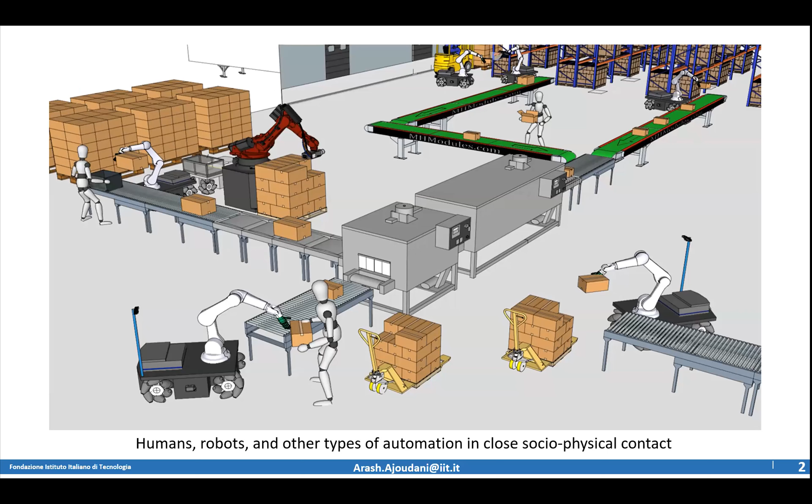The title of my presentation, as you can see, is the Anticipatory Control of Human-Robot Interaction. What I will be talking about is how we are building, with my guys in the lab, the elements that push us and motivate us toward building interaction autonomy for robots that are supposed to interact with the environment and the humans.

This is an image we've created over the past years before we arrive at full autonomy for our robotic and automation systems, where most of these human-robot interactions can also be automated. I think for the next tens of years, we will have this scenario, and we are pushing towards creating hybrid systems. Robotic systems, flexible robotic systems, and traditional automation come in contact with humans, and robots and the environment are actually in close physical and social interaction.

What's really important, one of the most key features you can see, is of course the interaction happening between robots, as I was mentioning, traditional automation and robots. So the talk here is focusing on how we can actually boost this interaction autonomy on our robots.

If you look at this problem from a macro perspective, it's a naive presentation, of course. We have the corpus, which is the robot, interfaces, learning, control, everything that collects the way that corpus interacts with the environment and the human factors.

Starting from the first, let's say, closing the loop, the easiest way to perform and create an interaction autonomy towards the environment is to close the loop through visual perception, right?

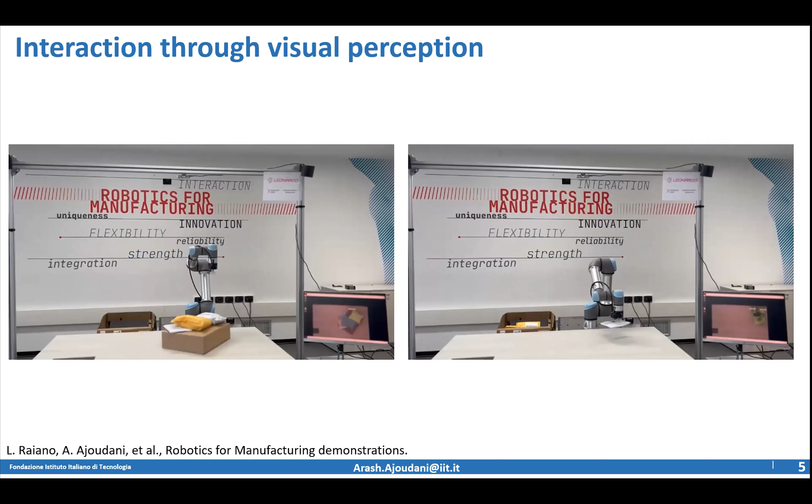So what do we do usually? We have really nice, reliable perception systems that we are also developing in the lab, that detect environmental variations and we plan accordingly for grasping randomly thrown objects or objects that are put one on top of each other. This has been really nice, and most of the approaches are like this: one-shot perception, planning, and manipulation.

Perception is one way, visual perception, but of course it's not enough. Most of the cases, we are also interacting through touch. For instance, for a blindfolded robot, we want to increase its interaction autonomy only through touch. Believe it or not, planning impedance and planning interaction is really, really important to make your robot plan autonomously.

Let me give you an example. If someone wants to pass a wire from a hole there to a hole coming up from there, you don't really know what's the path, and you don't have to plan for the trajectory. You just push the fishing wire with the wire attached to it, and it finds its way out. And how it works, it's actually some sort of impedance planning embedded to it.

For those familiar with the concept of impedance control, especially when we represent the impedance stiffness and damping at the Cartesian level, both for translational and rotational, with the stiffness ellipsoid - through singular value decomposition you can know in which direction, what type of stiffness and damping you're applying. You can actually plan for this in advance and have some principles that help you towards better interaction autonomy.

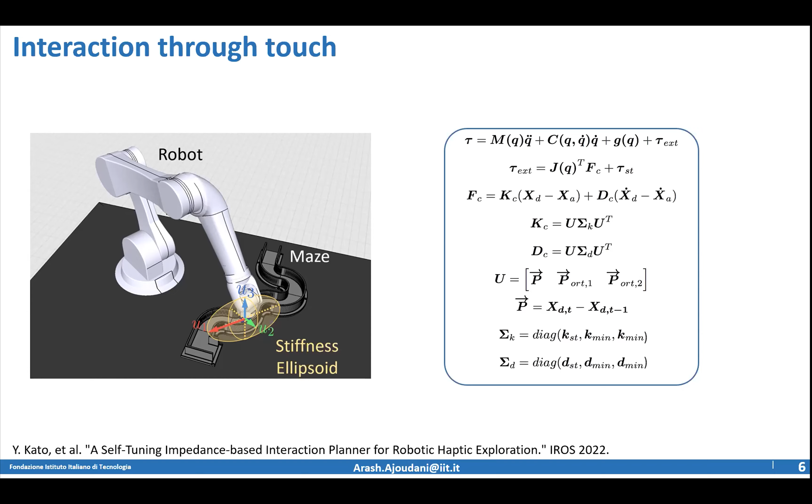It's really nice that we only need 2 points while the robot is moving around the environment to be able to replan. The main rule is to be stiff in the direction of the movement, stiff enough, and compliant in the rest of the directions, so the constraints coming from the environment can help you navigate without seeing it. If you have the first contact, since you're stiff here, the rest of the compliance will let you comply with the environment and move along.

You will arrive here. Through these 2 points, you can actually update your stiffness ellipsoid and damping ellipsoid if you want to do inertia shaping, the whole impedance parameters, and you can move and finalize the path. We need to actually plan for some unexpected, really rigid constraints, and we have implemented some bouncing strategies to perform this task.

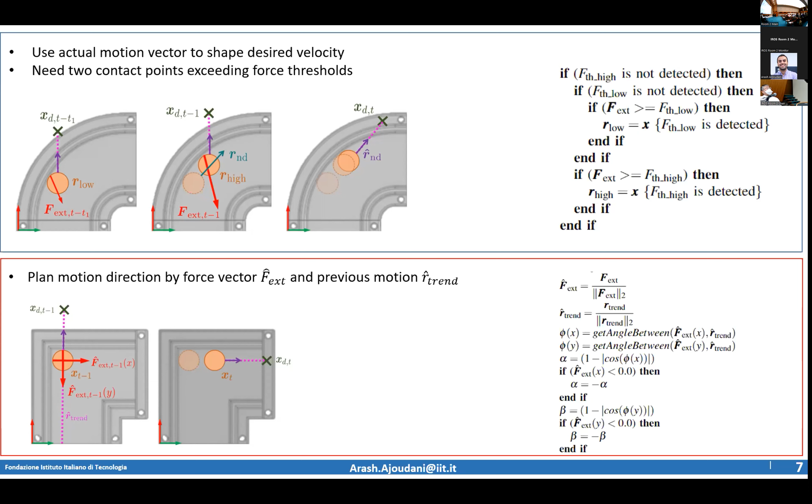This is one example that we did with Yasu and Toshi and my guys in the lab. What happens here is that, only through interaction, the robot finds its own way. On these 2 columns, we have the same planner, but with low and high constant impedance values. Even though it tries to find its way out, impedance planning seems to be really important.

You can see the ellipsoid is changing according to the contact forces that it's perceiving and going through the path. Also, when it comes to external disturbances, it seems to be very effective.

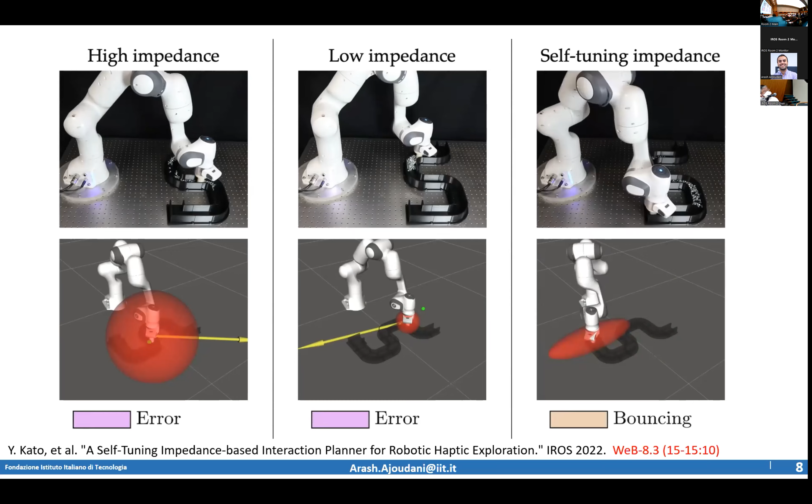Someone might say, okay, in terms of interaction with people, robots, this is really a good communication channel to boost robot autonomy.

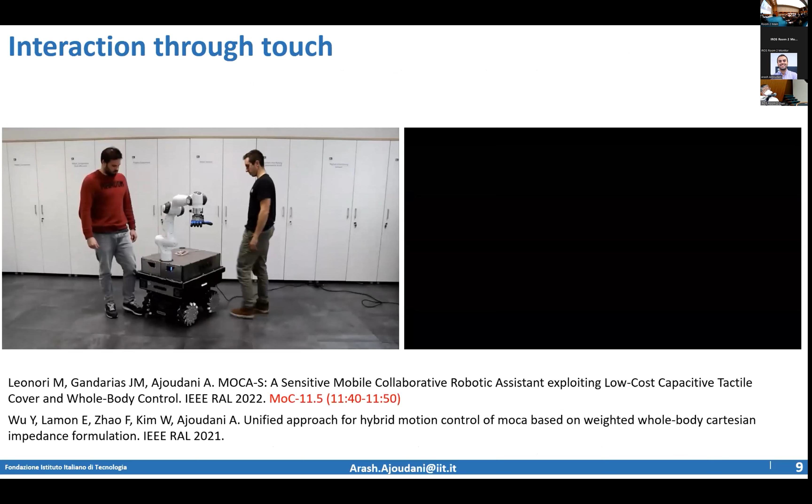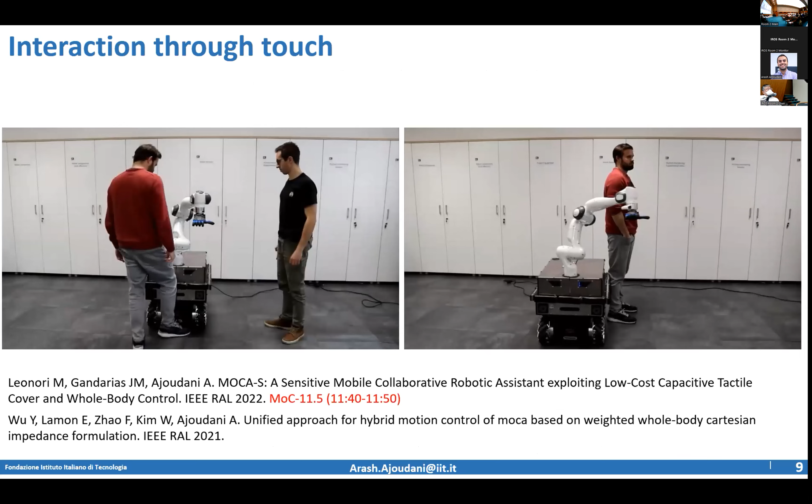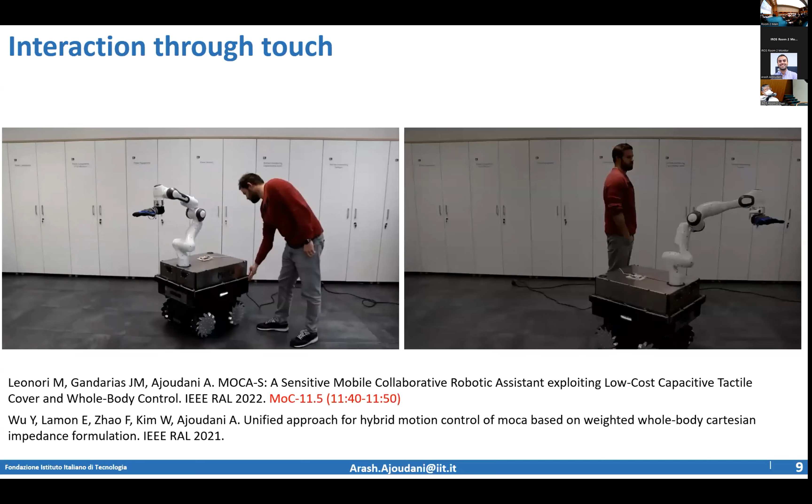Today's robots are torque controlled. Even if you have velocity controlled robots, you can put skins that we developed around our MOCA robot. You can see Juanma and Mattia here touching the robot from any point, and the robot is complying with that. Since touch is the lowest important layer for interaction and ensuring safety, we have also embedded this in our planners.

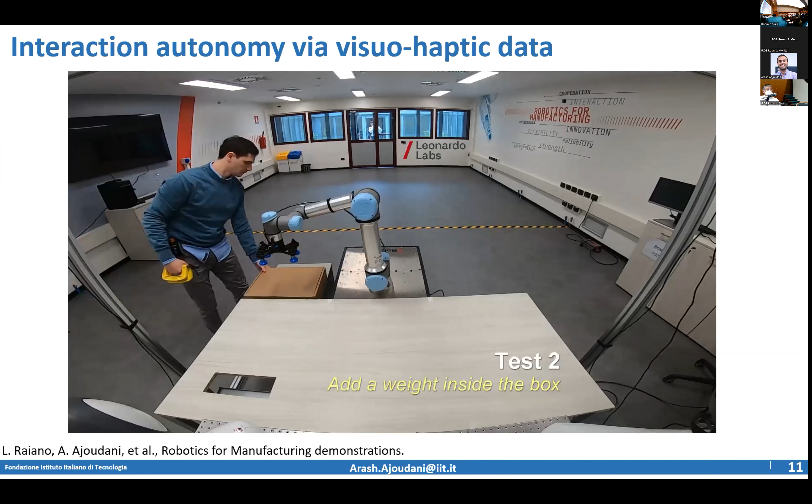It turns out, of course, it's a great idea. We have been working on this, everybody has been working on this for a long time. For instance, through vision, you can detect a box and grasp it from its geometric center. But what happens when the center of mass of the box is changing? You can actually measure this through your torque sensor, replan, and improve the reliability of your interaction planner and your interaction with the external environment.

The robot has no idea what's happening. It grasps, detects the changes of the center of mass of the box on the fly, and grasps it from where the center of mass of the object is, not the geometrical center. So it actually improves the robustness of your interaction autonomy.

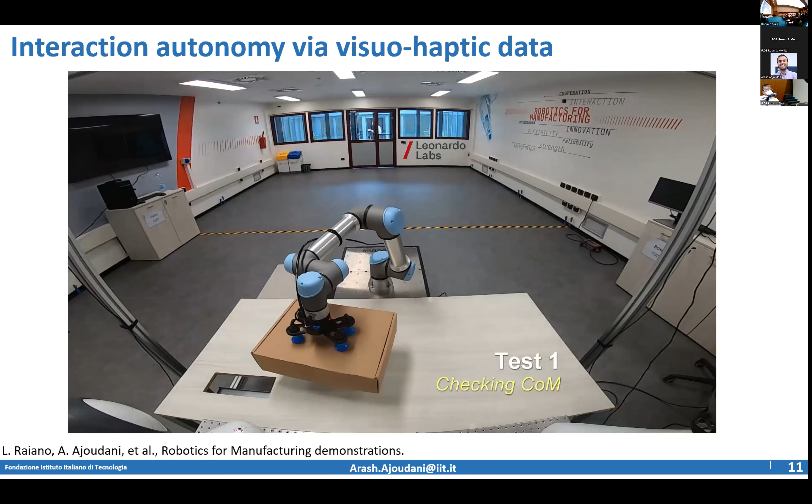But quite frankly, it's way beyond just combining visual perception and touch. It's not a plus, it's more of a regulator, and it depends on how much confidence you have on the sources of information from vision, force torque sensor, or haptic data. There are many sources of uncertainty that tell you which source is more reliable. You can have uncertainty in visual perception, calibration, modeling error, latency, control errors, and disturbances.

Just to give you one quick example: imagine you have a robot that does single shot planning based on visual perception. The robot goes and picks an object with algorithm 1, and it goes towards the second object with algorithm 2. You might ask, which algorithm performs better? Everybody will say algorithm 1.

Most probably yes, but probably also not, because maybe all the uncertainties of the system are in favor of algorithm 1, which is actually working worse than algorithm 2. So maybe algorithm 2 is more globally valid, and you were just lucky that uncertainties of the system, simply an uncalibrated robot, helped you arrive at point 1.

So we get into this more in detail. For instance, in a really complicated box item sorting task, which is one of the use cases in the Sophia project that I'm coordinating, this is really complicated because there's a lot of uncertainty in the placement of the box and the way the objects are placed there.

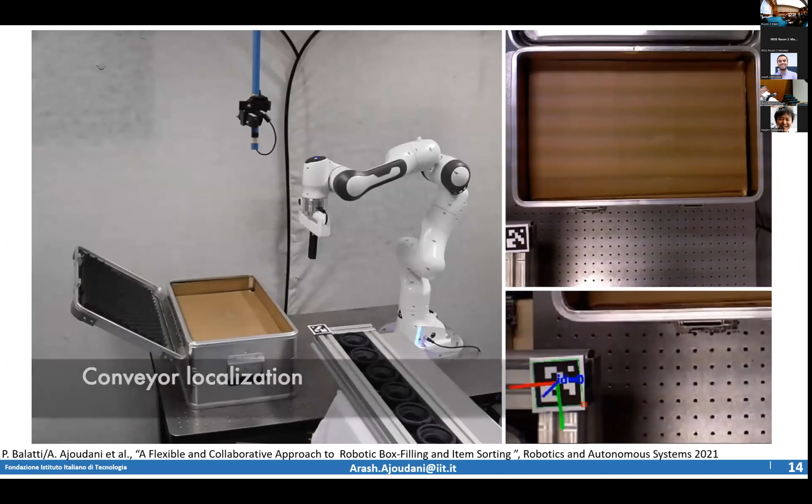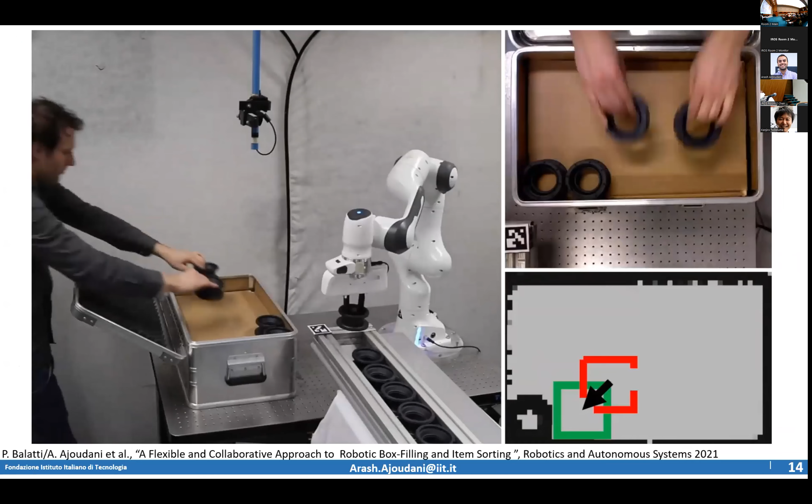Bringing this into robotic application, as you can see here, the robot intentionally adds some noise to our visual perception. You can see the robot taking this through the occupancy grid map. It plans where it should start, slides through impedance planning as I mentioned, exploiting environmental constraints to perform this planning and complex, interactive, contact-rich task without a super fancy position or trajectory planning involved.

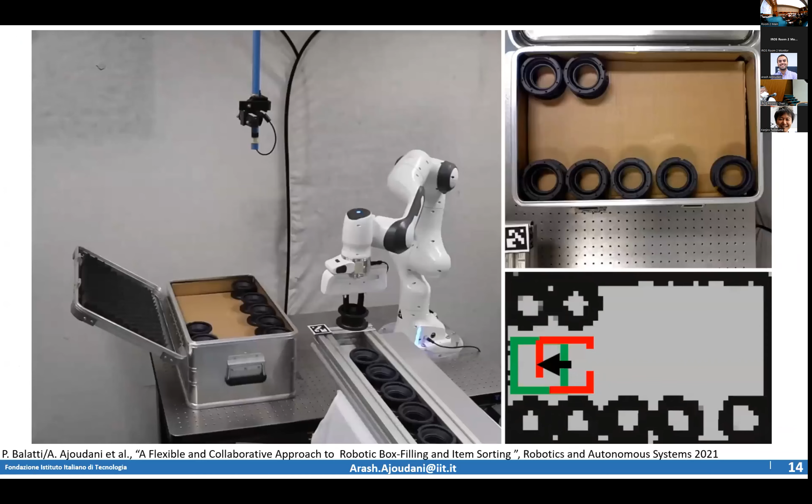So this algorithm is not designed to be collaborative, but at its core, since you're complying and responding to external disturbances coming from the environment, you saw Pietro change the position of the box. Visual perception captured it, but there's some level of uncertainty to it.

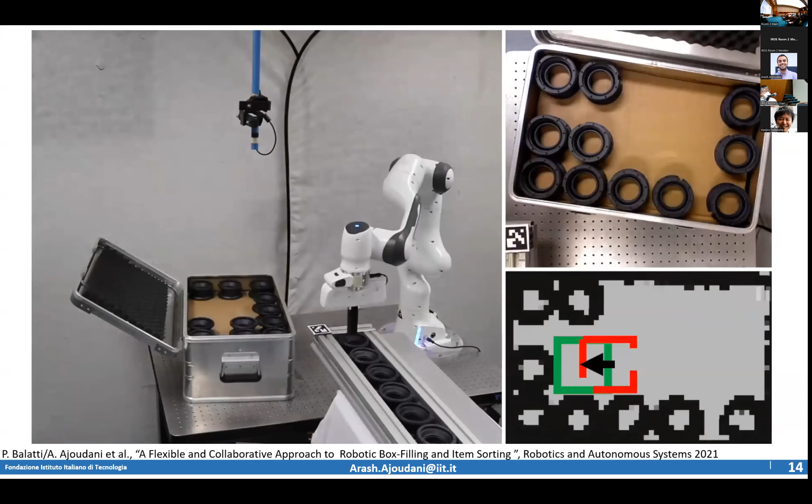You can also capture if objects are being added or not, so the robot is actually adding and responding to that on the fly. There's no need to reprogram everything, because you can just tune your confidence towards different perception sources that you have. Even if you have different objects inside the box and ask it to resort them, you can see this nicely through visual perception plus planning through touch.

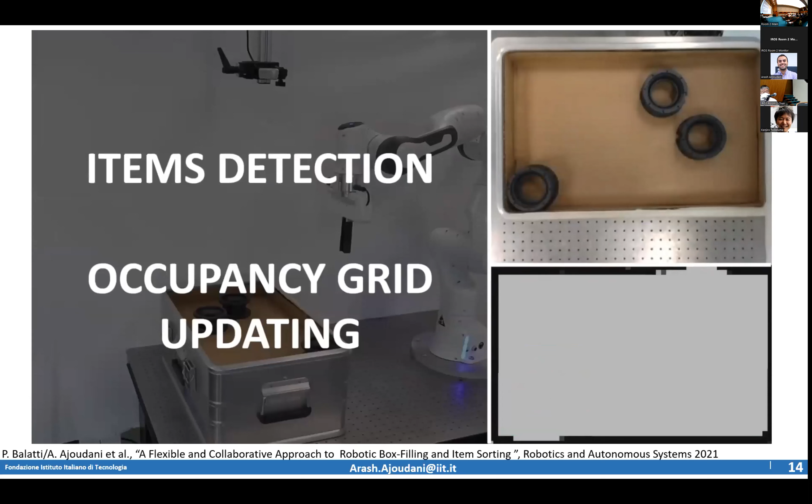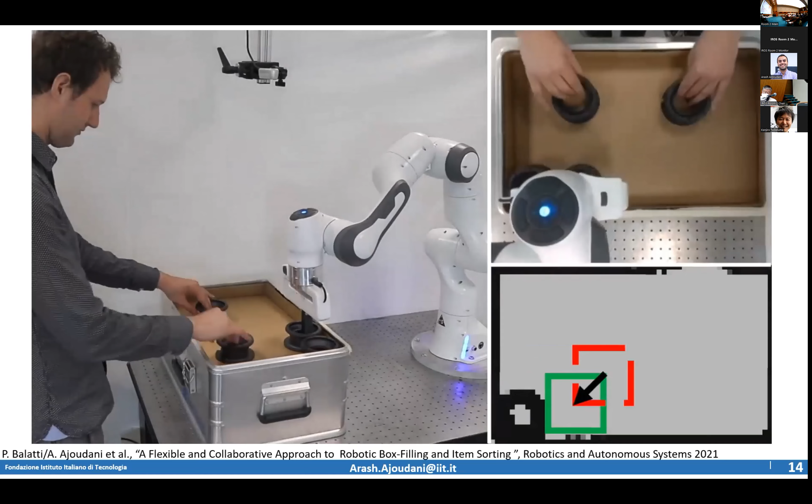You can simply replan them, even if you can create collaborative systems without even knowing that you're creating collaborative systems. Pietro feels like contributing, and he puts some more objects, and the robot replans and makes actually the thing faster.

So just to give you an example, if you don't do impedance tuning with everything else included, in a certain phase you're sliding towards putting this object here, when the contact happens you have a rigid constraint. And if you're rigid in all directions, you will have high interaction forces, which happens without self-tuning, and the robot triggers the fault.

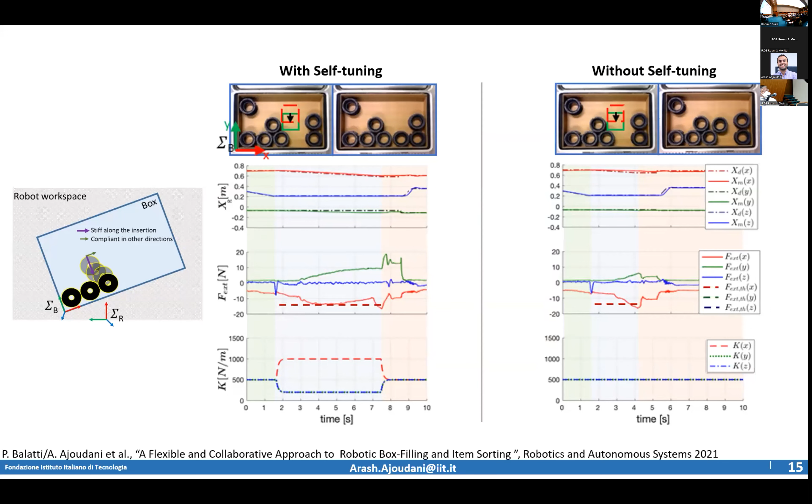You might even damage the environment. But on the other hand, if you're compliant, as I was mentioning, you can perform and respond to the uncertainties that come from the planning task or the environment. The balancing of visual feedback, visual information, and touch is also really important to go beyond what I was mentioning.

For instance, in collaborative co-carrying, what we usually do is build our admittance controller based on what the human is applying. Doganay is applying some forces here. The robot responds through a whole body admittance controller, plans torques and virtual torques for the environment. But what happens if you have a rope? It's flexible, right? So you cannot really get information in these directions.

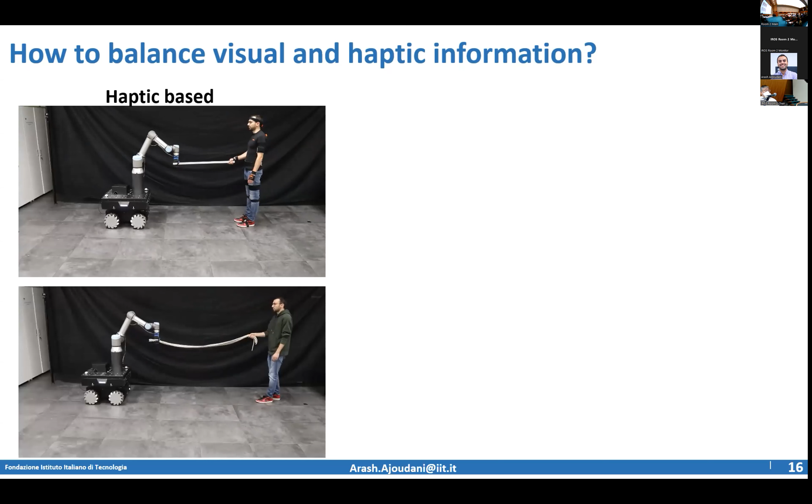And the force information you get in some directions is imperfect. You need to push so that you can feel some forces that you can move it along. You might say, okay, let's just do some sort of teleoperation locally, you just watch the person move. It works, of course, for the robot, but it's not going to work for this because you have to create some movement before you are able to go.

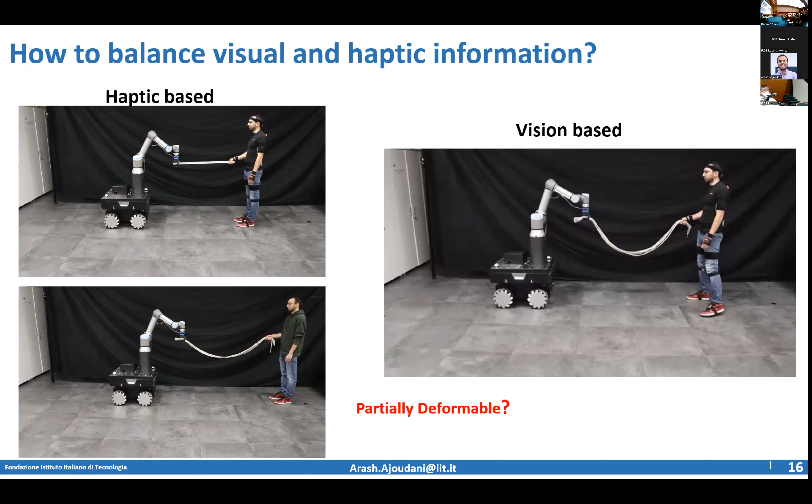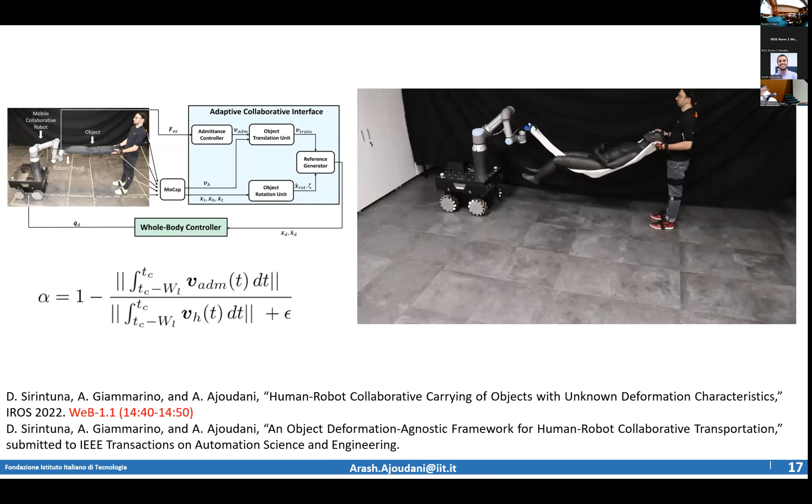Especially when you have partially deformable objects that you don't want to model because it's useless, you can actually respond to that. So we started to look into this. It's more elaborate than that, please do have a look at the papers, we have one presentation in this direction as well. What we do is on the fly, in real time, look at how much information we are getting from vision and force, and adaptively configure our controller based on that.

So one of the PhD students passed away. No, I'm kidding, of course.

So this is just a mannequin, and as you can see, Doganay is moving the robot. It's a very flexible, let's say, material. And you can see through intention, through posture, you can do not only translation but also rotation. It's quite nice. The controller has no clue what you're carrying. It can be rigid, flexible, semi-rigid, semi-flexible, also directionally different, and you can actually perform these tasks.

So we also, as I mentioned, did some testing on semi-flexible objects, and it turns out that you're actually applying less force even on rigid, and in semi-rigid cases, it's easier and more reliable in terms of effort to carry objects from one point to another.

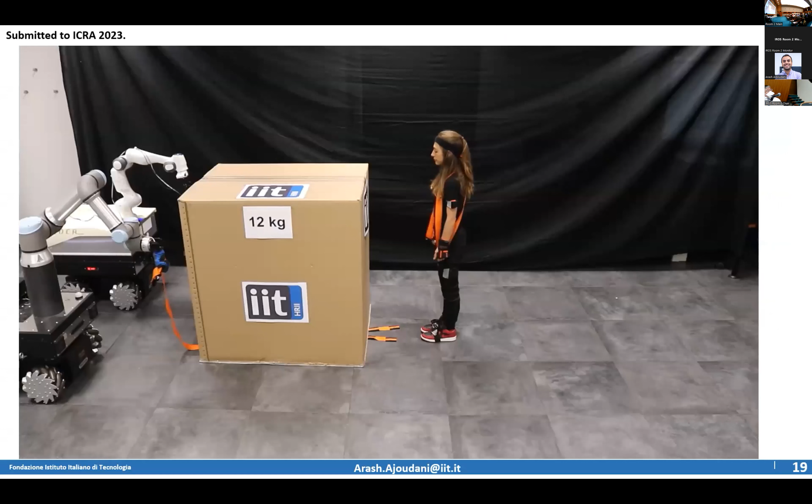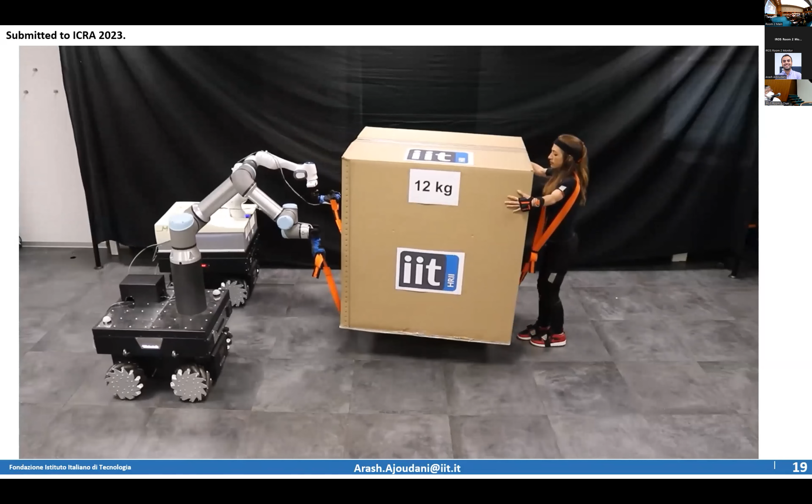So we didn't stop there. To carry non-graspable, really bulky and rigid, heavy objects, you can actually use these straps. The same technique works for multi-robot control, and through this, Idil is actually co-carrying this large box, and the robot is only reflecting all the twist and wrench basically at its end effector, and according to our planner is moving and helping Idil go up and down, left and right, rotate, and all that. The robot has no clue about what you're carrying, just like before, and has no clue about what the other robot is doing except just avoiding the collision.

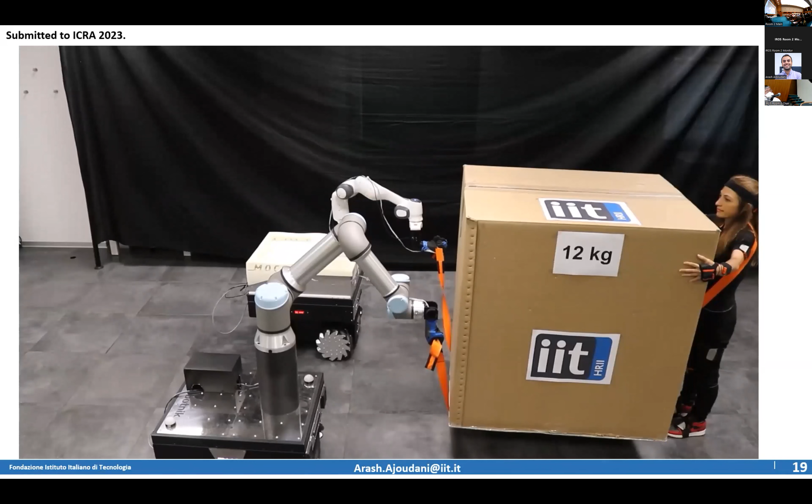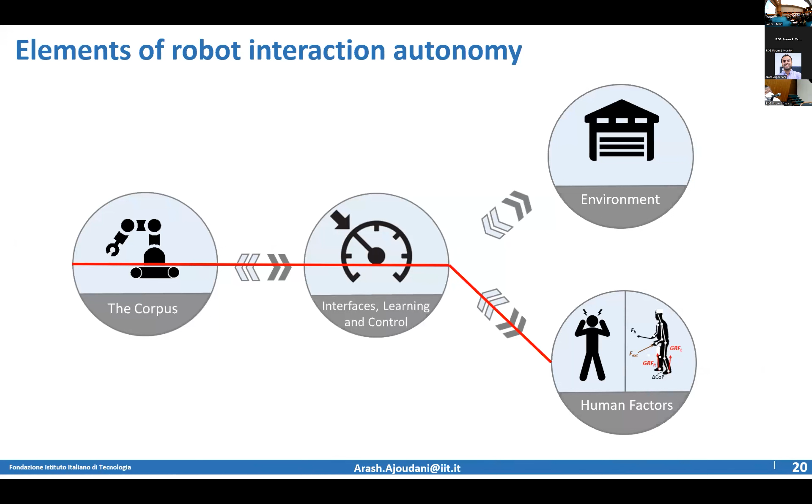So this is a little bit of course, we are working more on that, but just to tell you a little bit of some stories about how we can make sure the interaction between robots and the environment is also effective. So we've been doing some research over 5-6 years on this, but I'm going to walk you through a little bit of what we have been doing in physical and cognitive modeling of human intention.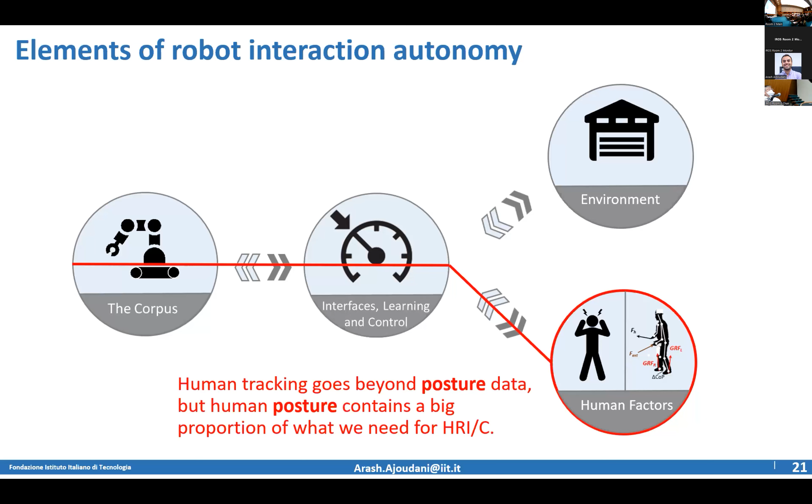And our approach is to look at the posture. Posture data is way beyond just movements of the people, and I will tell you how we are looking into this. So from the physical perspective, our approach of modeling humans is humanoid based.

So we started from a whole body control point of view, saying that, okay, you're in equilibrium condition, center of pressure is here, ground reaction forces. When you have an external force applied, center of pressure displaces, ground reaction forces change, set up your whole body controller. We have some tricks there, 5 papers, please have a look at them, actually 4.

And then you find out what the effect of external force is on your joints—it's called overloading joint torque. Obviously, we wanted to calibrate and personalize this model through online models. This black shadow shows the minimum required information for you to build this model, whatever you need, once in a lifetime, unless you eat a lot and your center of mass varies.

After identification, which takes a minute or so, the model is built. So in real time, as the person moves, we set some risk levels. When Luca is going to pick this object, the overloading joint torques are shown. In real time we can track them—you can see the shoulder becomes red and stuff like that. It tells you how much loading you're applying to the person.

We had an assumption that the person is interacting with the hands. It's a valid assumption, but not always the case—sometimes you're interacting with the external world through the elbow. These are also really nice tools in robotics and humanoid theory: through torque equilibrium, you can understand where the point of interaction is by setting up the torque equilibrium condition at the joints. But the bad thing is it gives you a line that might collide with several joints. Since you're moving, you can build a probabilistic approach telling you the likelihood of a particular link undergoing an interaction, using some techniques we built.

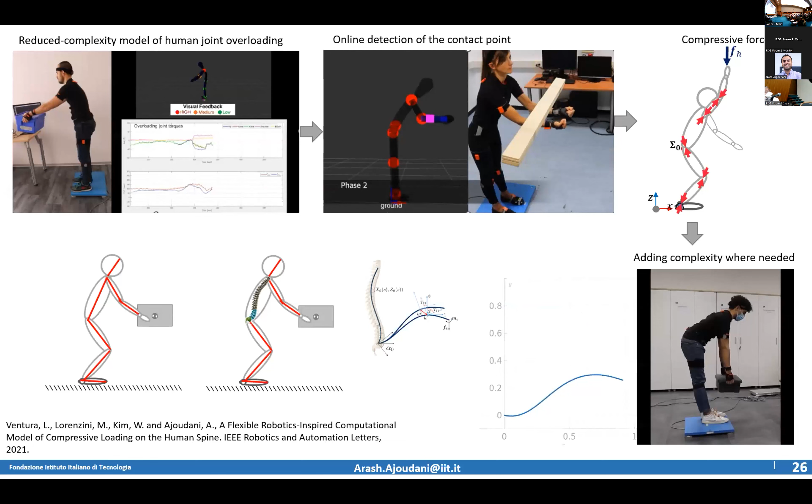Some indication was given on the physical factors. On the cognitive factors, we have a very similar approach—we're just watching people, no EEGs, no other sensors, no invasive sensors. The whole point is your body talks so loud that sometimes when you're saying stuff, it's against it.

This is Marta, and she's working on looking at how we can first understand the attention of the person by setting some frames on the face and the environment. You understand where the person is looking, and you can build your confidence level on the vision. If you're lacking attention, then your controller and planner should rely mostly on the haptic data, right?

Going back to the first point, you can actually see if the person is sleepy or showing some abnormal behaviors that you're not expecting. To measure cognitive load, you're also looking at hyperactivities, such as self-touching, face touching, or knowing that somebody's moving their legs so fast—that tells you the person is loaded cognitively.

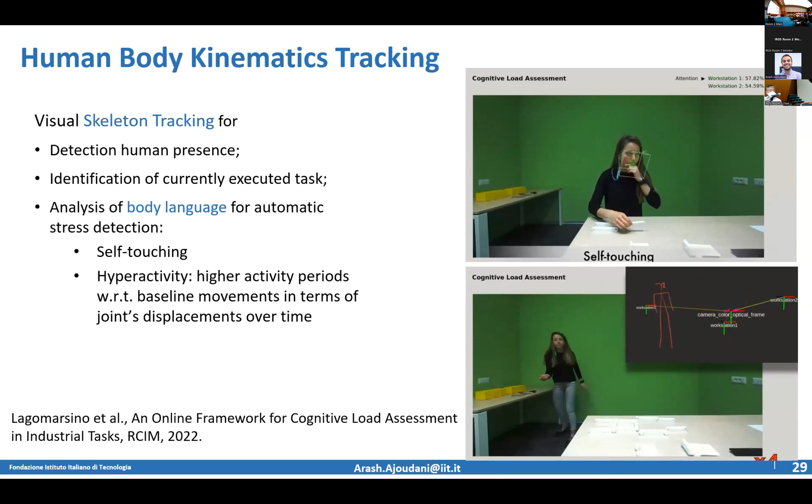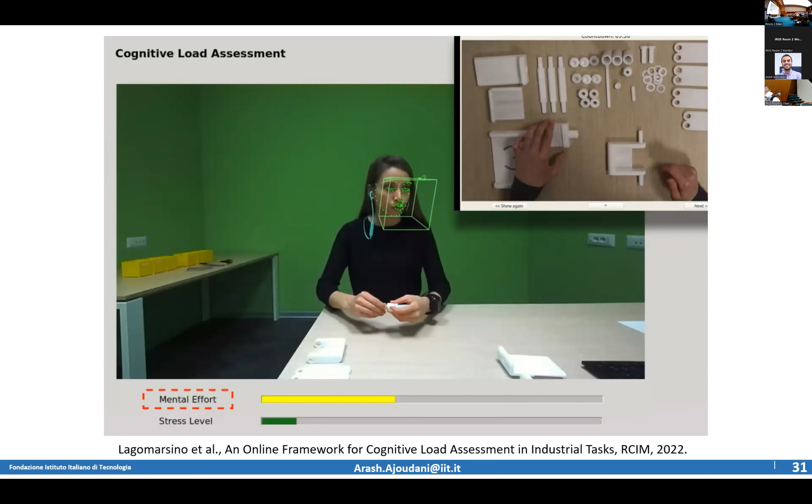So putting everything together, these are just some examples I was giving you. In addition to others, you can build your model, and this model can give you in real time some indication of mental effort and stress levels, right? As a ground truth, we compared this to galvanic skin response, heart rate variability, and other measures to make sure this is actually what we are looking for.

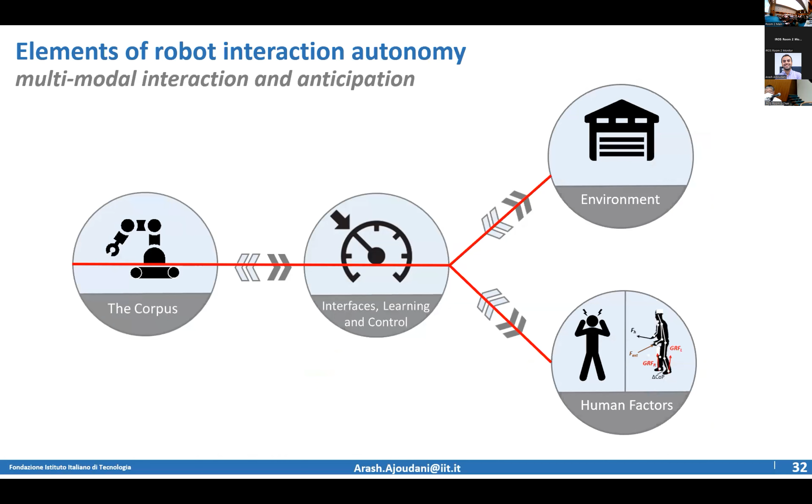So now let's see how we can put everything together, including the controllers, and how we can actually anticipate the interaction that happens between humans, robots, and the environment. For us roboticists, anticipation is nothing more than setting up an optimization, a reinforcement learning, anything you want based on the type of information you have. Imagine you just use your overloading joint torques as a closed loop.

You have an offline identification model, you're interacting with the environment, and then you can say, okay, I want to minimize these torques. I put it in a QP optimization with some sort of weighting. Whenever some joint torque increases, I will automatically increase that weighting, so I want to minimize that torque. And this is subject to several constraints.

Let's say your support polygon constraints, interaction constraints, external constraints, or whatever. It anticipates and tells you what you should be doing in this configuration, which minimizes the effect of this load on the joints, and doesn't let one single joint be overloaded. Just to give you an example, this is our early version of the MOCA robot.

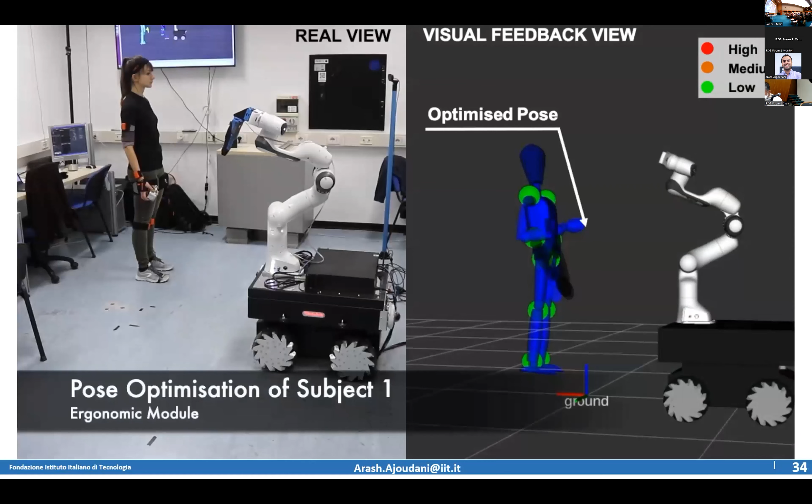It goes towards Marta. Here it recognizes just an object, so it's going to be just a handover. The only objective we are setting there, except all the joint limits, stability and stuff, is to avoid overloading joint torque. So it's basically what the robot anticipates as the most ergonomic posture.

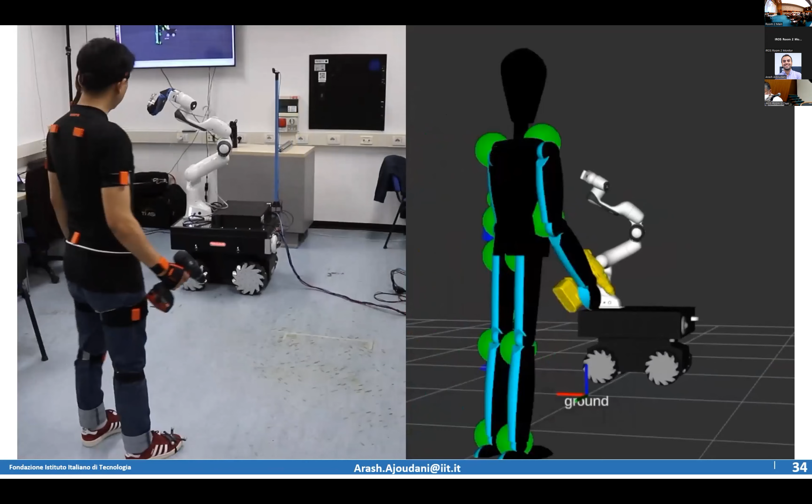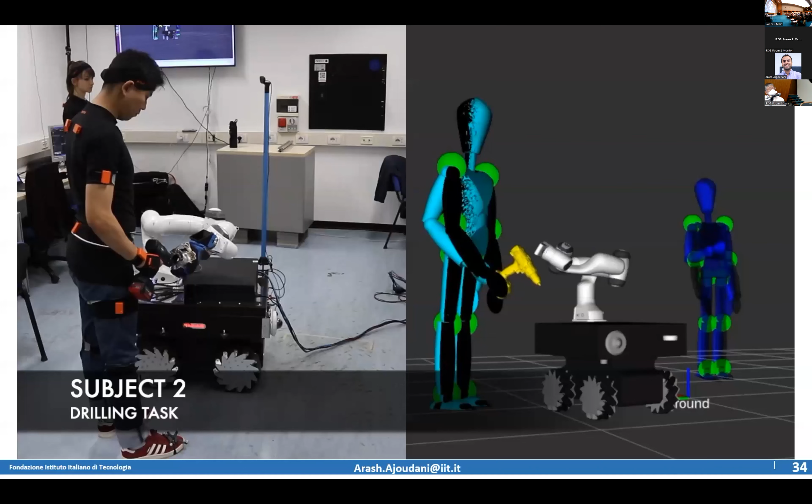But then Wansoo comes in with a drill, and the robot sees you have a tool you want to interact with, and it adds to the constraints. For instance, if you have a power tool and want to apply forces, you can increase the force manipulability, meaning you need minimum torques at the joint to apply forces. You can elongate your ellipsoid in this direction or make it isotropic, so you're more ready to respond to different sorts of forces.

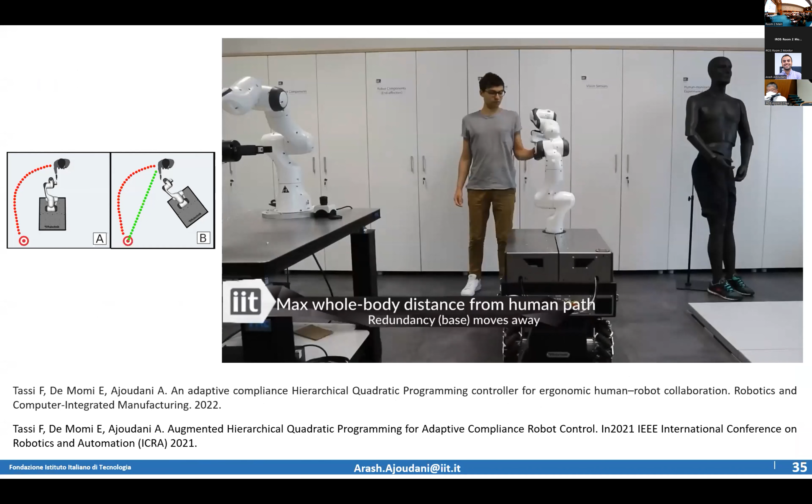So you can bring the anticipation to a context level. For instance, here Francesco is doing some ergonomic human-robot interaction, and the robot knows your next plan is to go to point A, and uses its 2 degrees of redundancy to facilitate this for you, so you can go from point A to B without having to go around the robot. If you're interested, please look at those papers.

When it comes to ergonomic human-robot interaction in terms of cognitive factors, imagine you're working with a robot in a box filling task. Your boss wants it done as fast as possible, and tells you, these are my performance indicators, these are my cost functions, and you have to go towards one.

But your psychiatrist says, no, that's not right, you should work as slow as possible because I want you to be smooth and calm. So you're setting up this Pareto optimal front optimization problem, and which point is correct depends on the state of that day, and also on a personalization aspect that we're looking at.

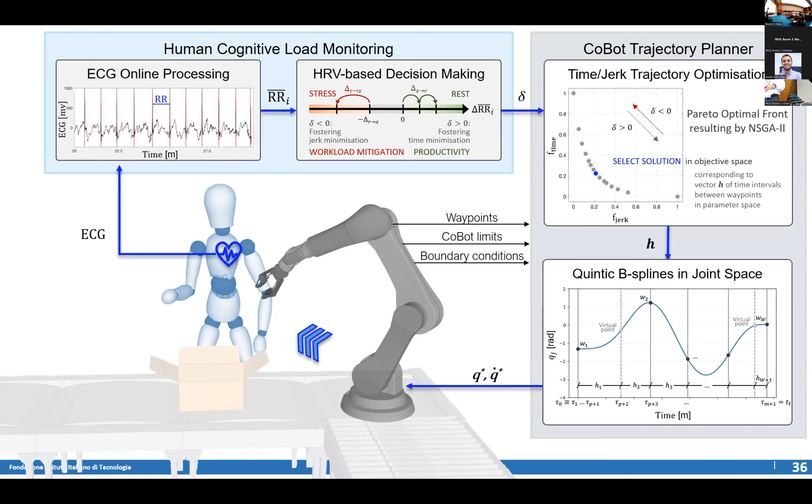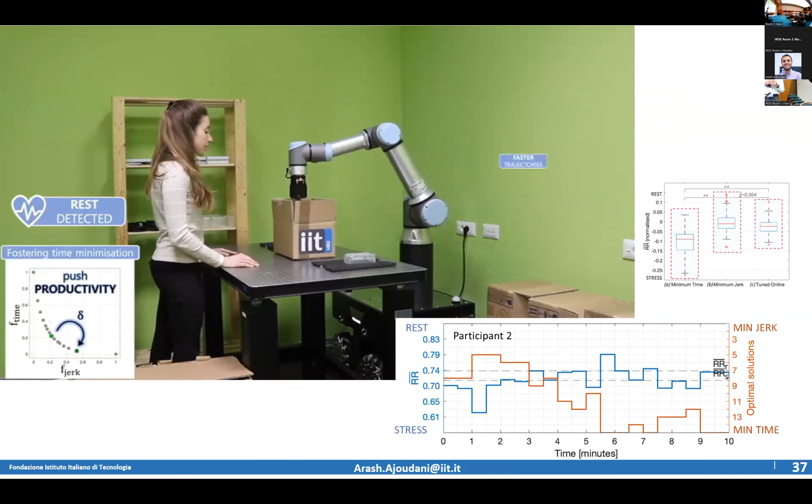So how you move across these points comes from the level of cognitive load, and the rest is basically some sort of planning that you'll see in this video. The robot initially captures some sort of rest state, then sees that productivity is very low and starts pushing on the speed.

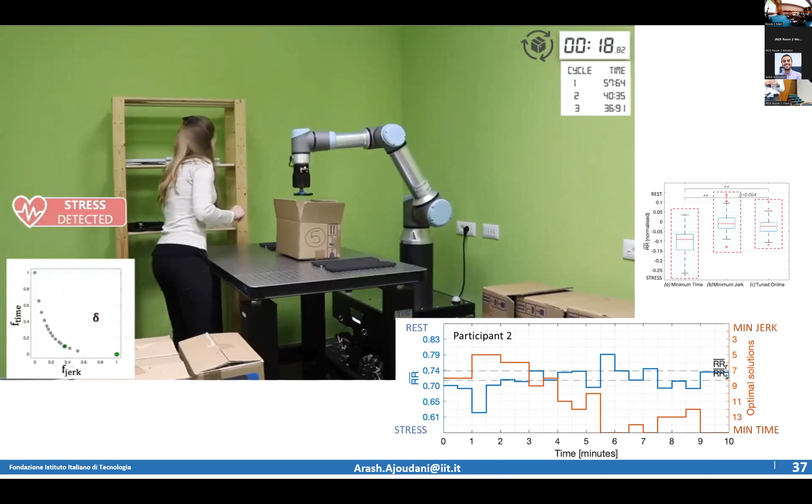When it's pushing on the speed, intentionally we exaggerate it, and it pushes so much, anticipating it wants to arrive here, even harder, arriving so fast that through some measures we capture higher cognitive load. The robot sees that it pushed too much, and goes back to a level of speed and smoothness that balances between productivity, speed of production, and cognitive levels.

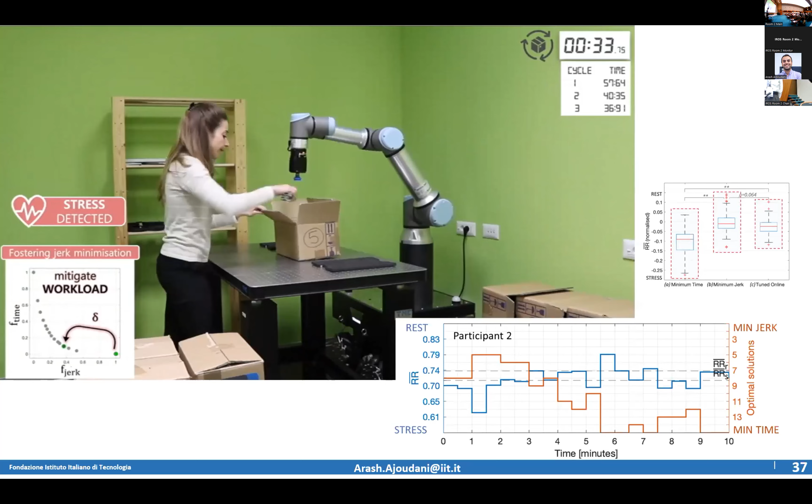So to conclude, I'd like to give you some key messages from this presentation. The first and most important message is, this is particular because we are in the era of machine learning, also in our lab, but we are sometimes neglecting the importance of impedance regulation in planning. Impedance regulation is not only for contact.

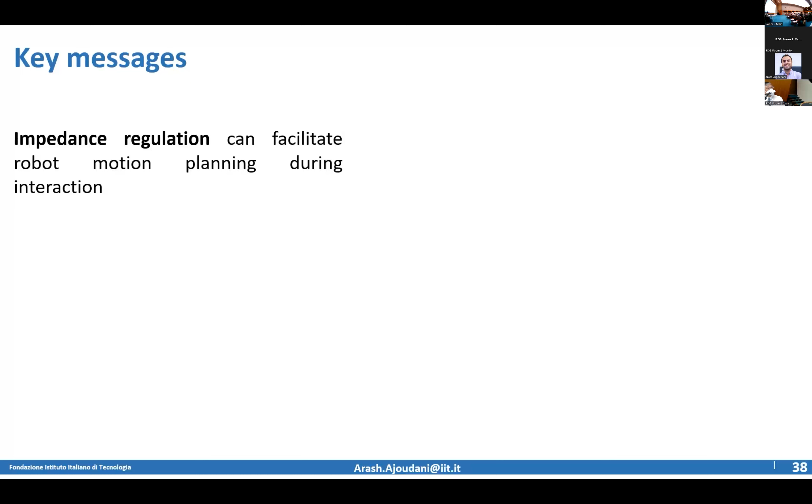Of course the main perspective of doing impedance regulation is to have a reliable contact, but you can use impedance regulation as part of your planning. So it can reduce your load on precise planning, and it can really be used to have reliable interaction between the human and the robot.

That is why, as in the example I mentioned, we should not trust either one of these sources alone, especially since most of the time we do single shot perception and then manipulation. We definitely need to do either a continuous way of perceiving the scene to make sure uncertainties from the robot and the environment contribute to high performance, or we can balance visuohaptic information depending on the level of confidence we have at the level of interaction.

Physical human factors go beyond movements of the person. So you just move the body and you detect the posture. But you can actually get way more in depth in these factors, and get not only human physical factors, but also cognitive factors.

The last and very important thing: I was at ISRR giving a talk, and Oussama Khatib said something I've always been thinking about, and now I feel more confident to say it. I think every robotic algorithm we develop on a physical system should be evaluated in contact, even if it's not meant for touch. Planning algorithms, anything that might not eventually come to contact, should still be evaluated in contact. It's important to understand the system's behavior in response to contact.

That's it, and I am really honored, thank you very much first of all. These are the people I have the pleasure of working with. My main lab is HRI2 at IIT; we are about 30 people. The second lab I coordinate is Leonardo, called Robotics for Manufacturing, about 5-6 people. I'm also PI of another joint lab close to industrial applications. I'd like to acknowledge the funding of my research, some European and national projects I'm coordinating. Thank you very much for your attention and for coming to my talk.